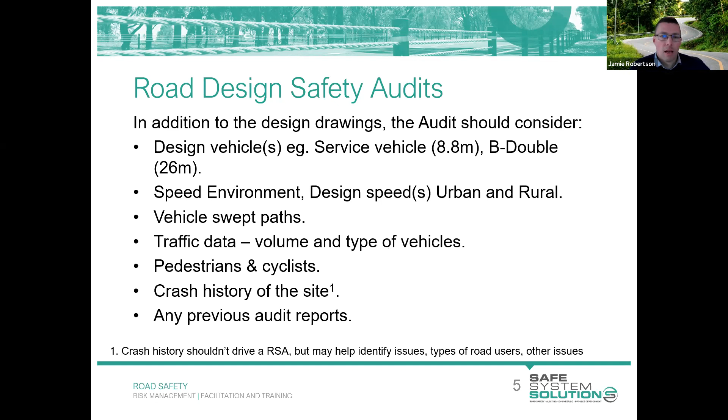I'd like to step you through a few common issues that we often come across when undertaking audits. A number of those are around the vehicles on which the design is based, so the design may not cater to vehicles or to an appropriate design vehicle.

This is probably a good point to talk about what is a design vehicle. A design vehicle is the largest vehicle expected to use a piece of road on a regular basis, so it's typically a truck or perhaps a bus that will use that piece of road frequently.

We also talk about checking vehicles. A checking vehicle is a larger vehicle, again, that we may want to check the design can cater for. The check vehicle is typically one that is expected to use a road fairly infrequently - infrequently enough that we don't design the road specifically for it, but we do need to cater for its movements. A checking vehicle typically isn't expected to make turns necessarily from the appropriate lane.

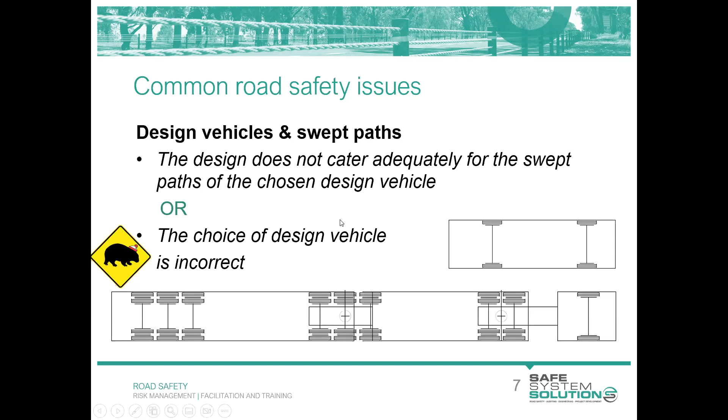You can get out on site. We're talking about design stage audits, but most design projects are upgrades to existing roads, so you can put yourself out on site, observe the types of vehicles getting about, look at the surrounding land use, and think about any changes likely to the land use that might attract larger vehicles, which might lead you to adopt a larger design vehicle.

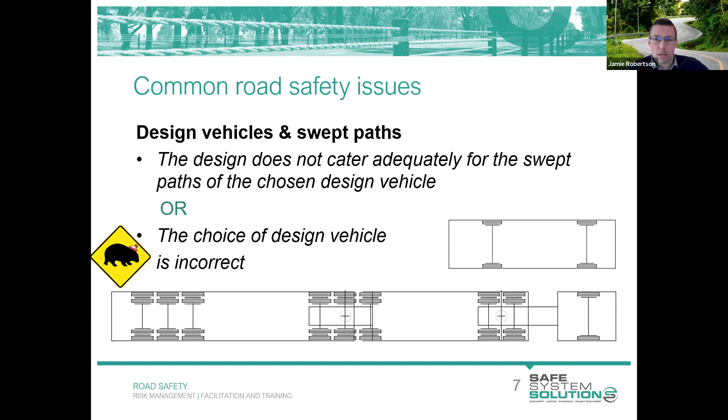So we've talked about the issue that a design doesn't cater adequately to the swept paths of a certain vehicle. Well, what does it matter? As an auditor, you need to think about the associated issue and safety concern. If the design doesn't cater to those larger vehicles, the result might be that those larger trucks encroach into areas they shouldn't, such as adjacent traffic lanes, which could result in side swipes, perhaps head-on crashes, even if it's an opposing traffic lane. Those vehicles might also encroach into pedestrian areas.

You might see vehicle conflicts between opposing right turns, for instance. A telltale sign that there isn't enough space for larger vehicles is impacts with roadside furniture. You might also see tyre marks over curbs and these types of things. So when you're out on site doing an audit inspection, pay attention to these types of things.

Now, that list of issues is all around there not being enough space for larger vehicles. The opposite can also be an issue. If too much space is provided as a result of adopting too large a design vehicle, that can open up the possibility of smaller vehicles taking corners at excessive speeds and so on. Too large a design vehicle leads to larger pavement areas, which might be hard to delineate. There are a range of issues associated with adopting too large a design vehicle as well.

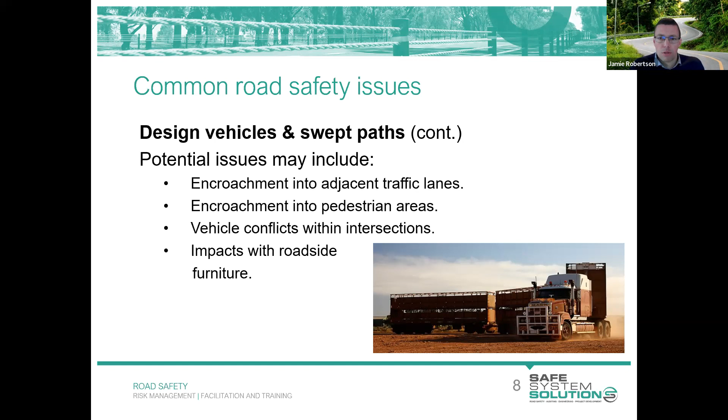There's lots of guidance in the Austroads suite around catering to turning vehicles, particularly at intersections. A couple of snips here from the Austroads Guide to Road Design, and on the right, the Austroads Turning Templates Guide. A few key things to note with these are the nominated radii. For particular vehicles, there are minimum and desirable radii for those vehicles to make turns at. A good swept path diagram will be transparent and will nominate the radius that's been adopted to generate that turn. Some other things you'll see there are some clearances between opposing swept paths, 2 metres in the case of the opposing right turns.

On the right-hand side, we see a swept path diagram for, I think it's a 19-metre semi-trailer, which might be on a 20-metre radius. Now, each radius, and there are a few given for each vehicle, corresponds to a turning speed. In the case of the semi-trailer on the right, we have a 20-metre radius, which corresponds to a turning speed of about 15 or 20 kilometres per hour. That's not a radius - it's certainly not a minimum radius. That's a radius you might adopt at a location such as a signalised right turn, where a truck might arrive on the green and make the turn with some speed. We can wind things down and adopt minimum radii at mandatory stop situations. And really, that's the only time we should adopt the bare minimum radius for a vehicle turn.

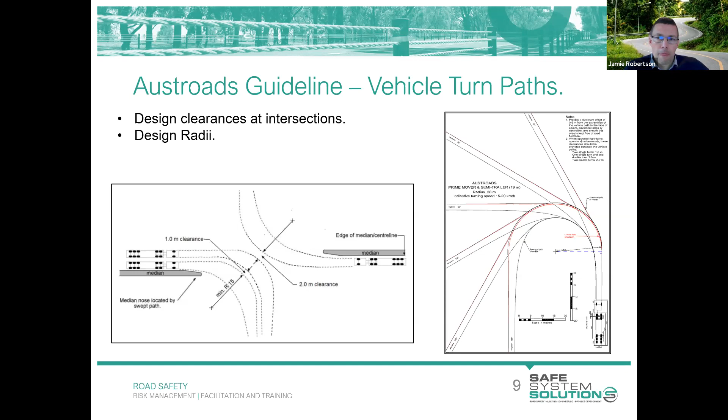So here's an example of a swept path diagram at a cross intersection. You can see one shown in purple and another in blue for the concurrent right turns from opposing directions. Clearly, it's a highly constrained site. You can see the property boundaries around the corners there, and not much room to spare between the property boundaries and our curbs.

We have a clearance in the middle between those opposing swept paths. So at first glance, you might think that looks okay, but if you study the purple one more closely, you'll see some funny things happening. One of the telltale signs is these little arrowheads that I hope you can make out along the centre line of the purple vehicle path. Each of those arrowheads basically represents a mouse click or a change in direction as that path has been generated.

The desirable way of doing things would be to construct that turning path on a single radius, a radius that accords with the Austroads guidance. And if that had been done in this case, you would have seen that swept path extend much further into the intersection and overlap the swept path of the truck from the opposite direction.

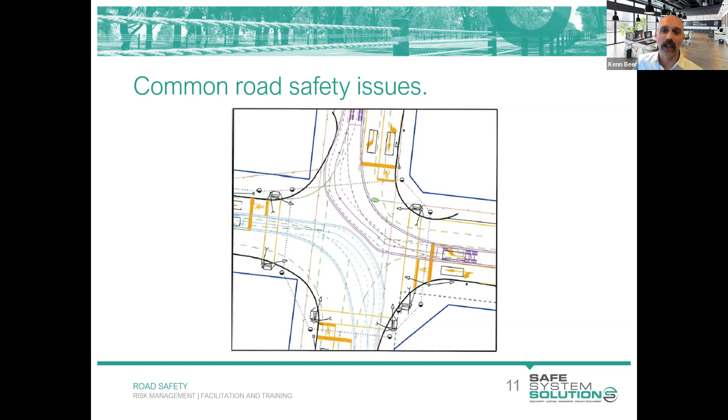If you're undertaking an audit, there is certainly a potential safety issue associated with the conflict between those concurrently turning vehicles within the intersection. A couple of things a standards review or design review might pick up that an audit wouldn't relate to the fact that the signal conduits are shown to pass outside of the road reserve, which is a no-no, but that doesn't have safety implications. Another potential safety issue at the top left corner is the lack of space available for a pedestrian footpath at that corner of the intersection.

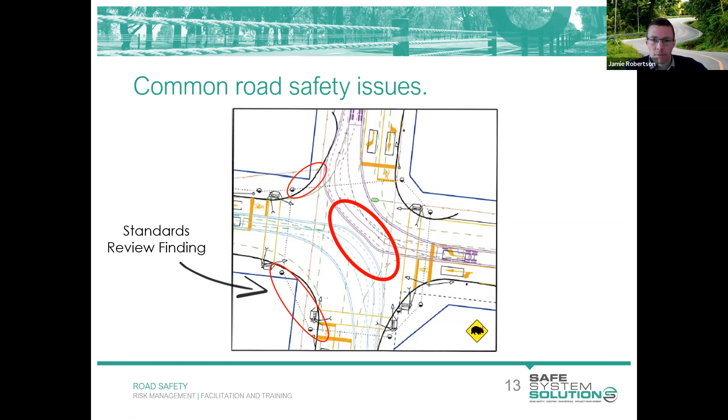This is another design that we actually inherited, and it goes to show there are some differing opinions around the application of swept paths in the industry. A design had been produced based on some swept paths. Essentially, the designer had assumed that if they could generate a swept path in a particular way, then the vehicle could make that movement and the design would be okay, without due regard to the Austroads requirements.

We found that when we generated some swept paths at desirable radii and turn speeds and so on, things didn't work at all. You can see here with the blue swept path, the left turn by a bus coming from the south, that movement encroaches significantly into this pedestrian area. So there's a risk to any pedestrian waiting at that corner.

This, unlike the previous swept path drawing, is more transparent. You can see the type of vehicle nominated here, which in this case is a 14.5 metre bus. The radius is detailed on the plans. Again, we have lots of lines representing wheel paths, vehicle extremities, and then that offset line on the outside.

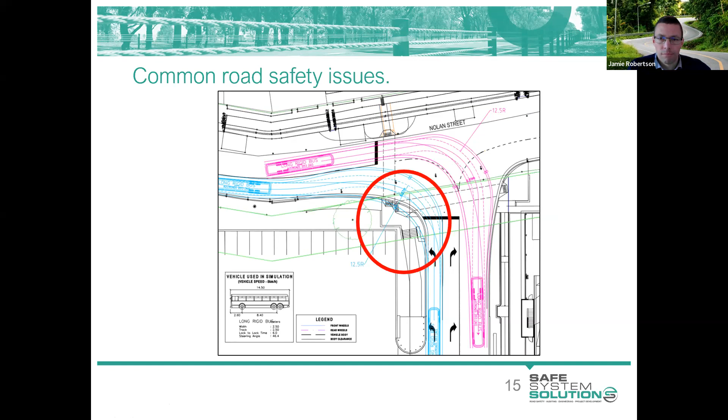Some other movements at the same intersection show there's quite an overlap between those vehicle swept paths that would be allowed to make those turns concurrently. So it is possible to fudge things in the AutoTurn software that's used to generate swept paths. But if you're using AutoTurn or reviewing swept path diagrams, be mindful of the Austroads guidance—the minimum radii, the clearance requirements between swept paths and so on.

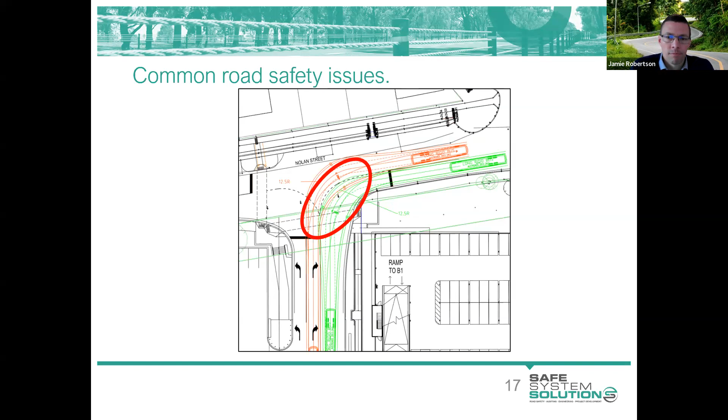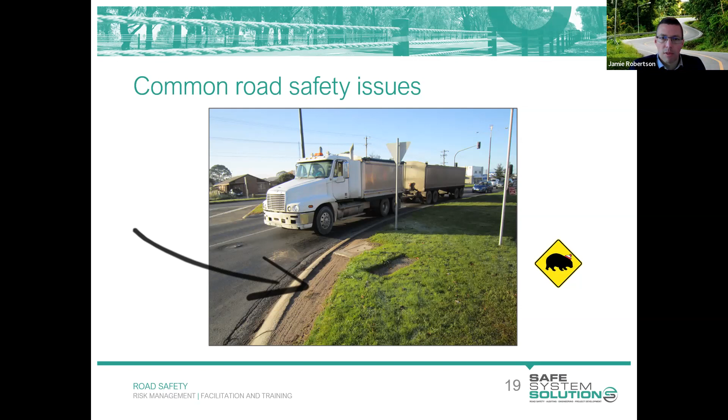It's not always the result of there not being enough space. Sometimes there can be issues with excessive speed at locations like this, or there can be a lack of advance warning or delineation to get heavy vehicles through that curve.

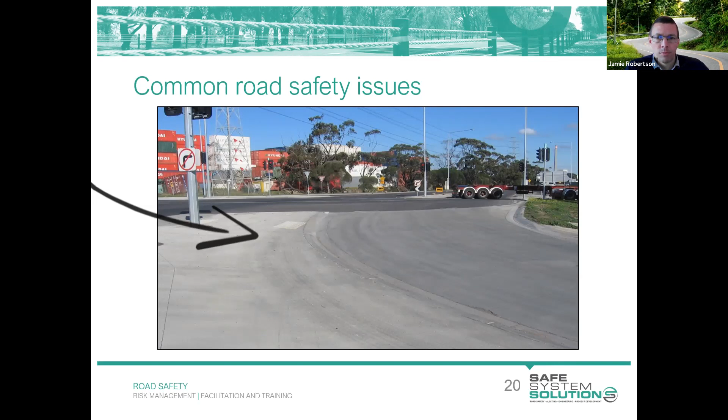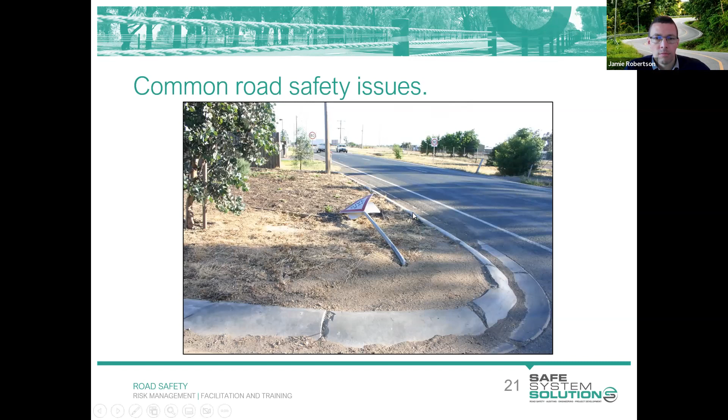Another issue that presents frequently is to do with sight lines. It can be the case that designs don't provide adequate sight distance for certain road users. You can check this at the desk, and you can also put yourself out on site and have a think about whether adequate sight distance is available. There are a list of sight distance requirements as long as your arm.

It's important for an auditor to have an awareness of relevant standards and guidelines when undertaking audits, not necessarily be an expert in them. That said, at the detailed design end of the spectrum, it is important to have a subject matter expert involved, and that can depend on the nature of the project being audited. If there's a pedestrian and cyclist focus, it might be someone with expertise in that area. If it's a geometric road design project, you might want someone involved who is perhaps a road designer with good knowledge of sight distance requirements.

There might not be adequate sight distance between motorists and pedestrians, perhaps waiting to cross the road. As an auditor, you can put yourself out there and attempt to cross the road at the required locations. Think about whether you would feel comfortable doing that, even before you've looked to the relevant standards. Think about, as a road user, whether you would feel safe making the required movements. If the answer is no, then look to a standard and see if you can back up your feelings by demonstrating that a standard isn't going to be met.

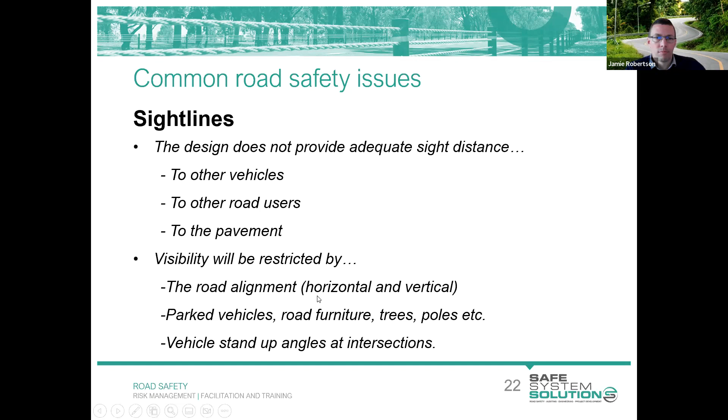One of the many sight distance requirements goes by the acronym SISD, and we might have a poll question here, I believe, Ken. Yep, I think we do. Let's get it going.

What does SISD stand for? Standard intersection sight distance, straight incline sight distance, safe intersection sight distance, somewhat impractical sight distance. Some good options there.

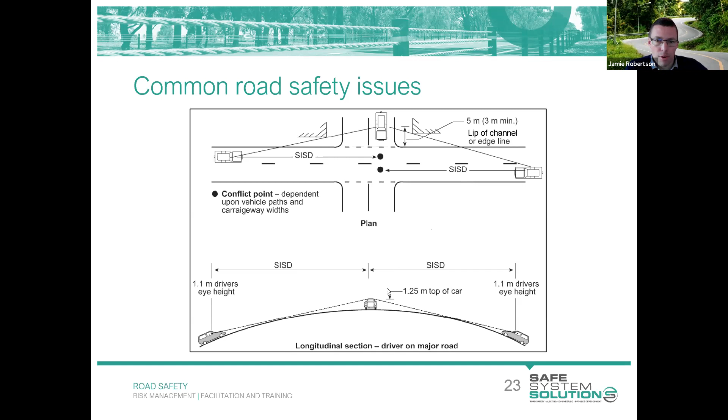Of course, with safe intersection sight distance and any sight distance, we need to look at things in the horizontal and vertical plane. Crests in particular can impede sight distance.

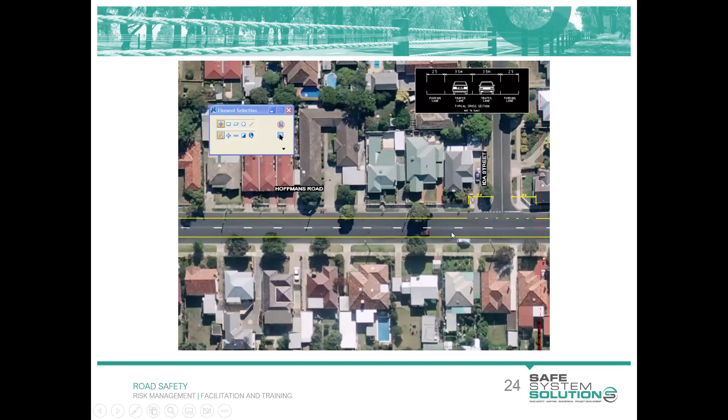A little example here of a road in Melbourne's north, which had quite a wide carriageway. At times when parking demand was low, this road would operate with a 4-lane cross section, which was less than desirable. An attempt was made to reduce the traffic function of the road, formalise parking by implementing some parking lanes. You can see some yellow lines there indicating that. This treatment was implemented, and those parking lanes, as you can see here, extend up very close to the intersecting side roads.

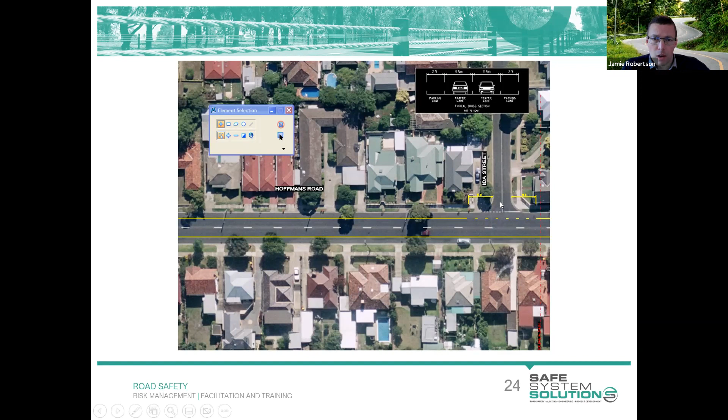This treatment was put in place, and it actually encouraged more parking and parking right up to those intersecting roads. An issue presented pretty quickly around cross-traffic crashes involving vehicles entering the main road from those side roads, and reduced sight distance was the key factor behind those crashes. You can see there a split second later, the car is upon you.

Perhaps I'll put it out to the group there, Ken, as a sort of retrofit. This has been put in. What could we now do to try and remedy this situation and improve safety for motorists entering from those side roads? All right, let's see if anybody's got any ideas, any thoughts there. What could be done?

Okay, a lot of people wanting to get rid of some parking there, Jamie. Often a bit of a challenge, isn't it, with local governments and removing parking? It certainly can be. Look, that would certainly open up sightlines if you removed even 1 or 2 parking spaces.

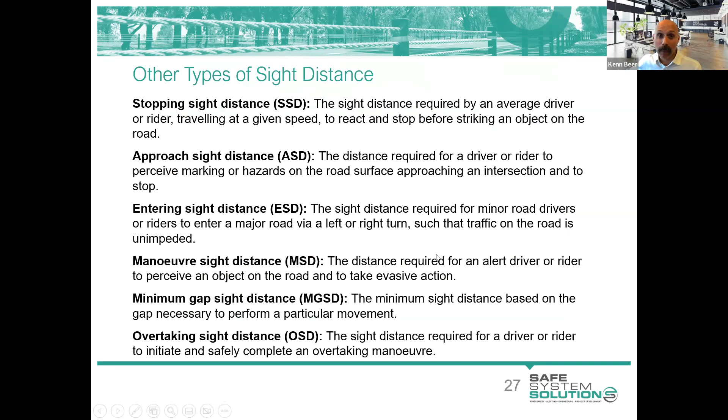So I did mention that there are lots of different types of sight distance. It can be a bit confusing - I'm sure some of you are familiar with these, some of you are not. Stopping sight distance and approach sight distance are the most basic and essential of the sight distance requirements. They're actually numerically equal.

The difference between the two is that stopping sight distance is measured from a driver eye height to an object on the road with an assumed height of 200 millimeters, which could be some sort of object, possibly a human body lying on the road. We need to provide SSD at any point along a roadway to allow motorists to react and stop in that situation. Approach sight distance is measured from the driver eye to the pavement level, and is particularly important at intersections

and other locations where there are pavement markings that a motorist needs to be able to see and react to. Entering sight distance, manoeuvre sight distance - some of these are more obscure, even nice-to-haves.

Overtaking sight distance obviously applies to two-lane roads in rural environments, where we need to decide whether or not we're permitting overtaking with broken dividing lines or not. If overtaking sight distance isn't available, we will seek to deter that with solid line marking.

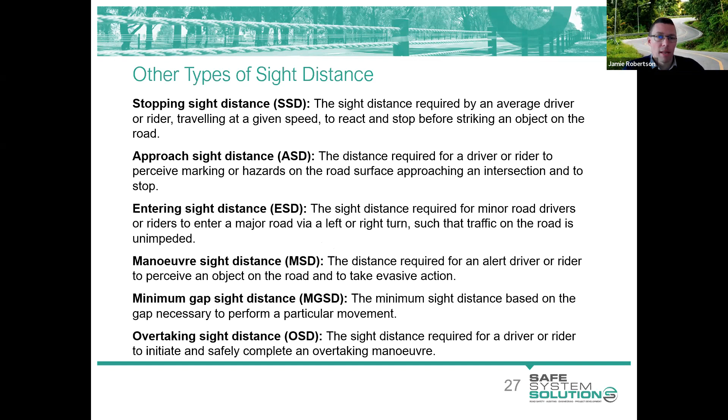CSD, crossing sight distance, is another one we can add to the list, which relates to pedestrians crossing the road - giving them adequate time and sight distance to judge an appropriate gap and make their movement across the road.

Often we're talking about long lengths of road with generally straight alignments. It's curves in particular, crests and dips - changes in the horizontal and vertical alignment - that can and do result in crashes. So it's important to provide motorists with advance warning of those features: curve warning signs, guideposts and the like, signs related to crests and dips and so on.

Surface condition and surface irregularities are another key contributor to issues on these roads. You can get corrugations, slippery sections and so on. So there's an important need for an appropriate level of maintenance, and alert treatments to warn motorists of those types of conditions if they're present.

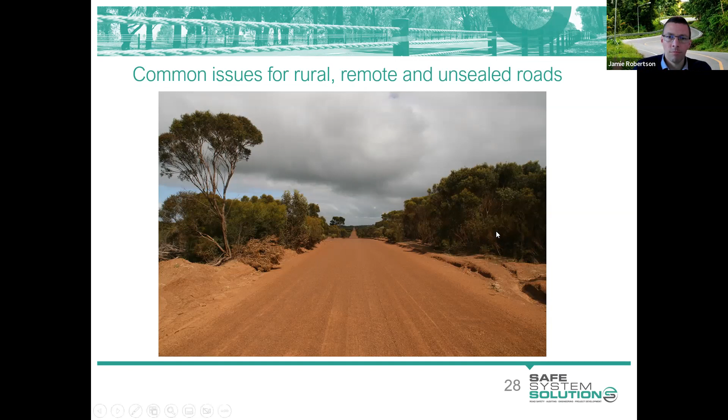So there is one for each of the design stages of audit. There's one for existing conditions audits, and there's a checklist for post-opening audits as well. So that's a good resource.

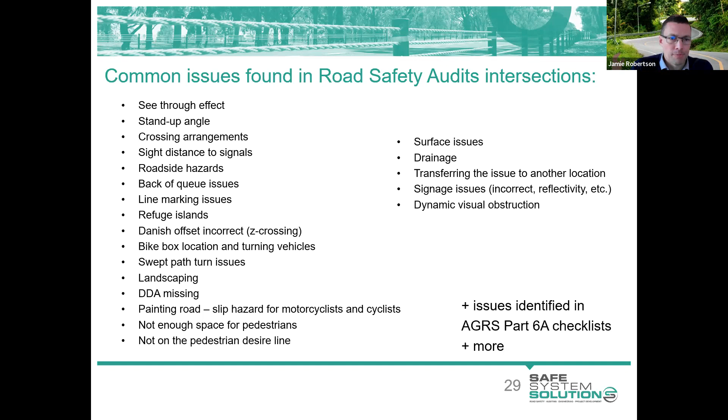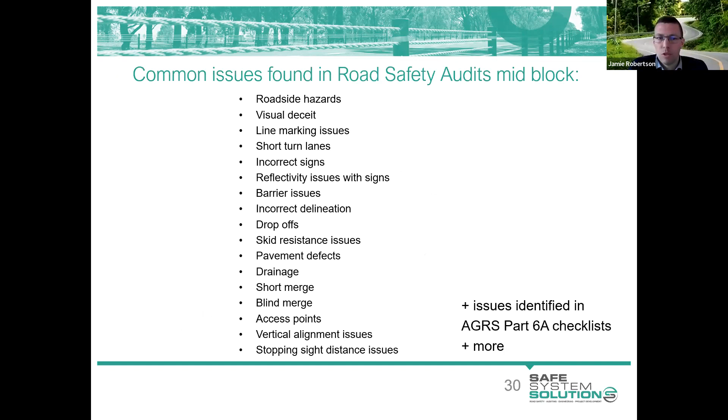Oh, Jamie seems to have paused on my end. Not sure if it's me who's paused or Jamie, but I'm going to just run through a few of these.

And so we've got roadside hazards, obviously. Visual deceit, which Jamie has paused.

Okay, good, thank you. Visual deceit, meaning, and we talked about that in the first module, different line marking issues, short turn lanes, and I'll pop in a prize for the crash type that you think.

There we go. He's completely disappeared now.

Short turn lanes. What would possibly be the crash type we'd be concerned with if turn lanes are too short? Any thoughts on that? Good, Michael in there nicely up front there with rear end, and side swipe's a good one as well. But we'll give Michael the prize.

So yeah, we want to have a think about the storage we're expecting and what's going to happen there. So let me just write that down.

And Tony, it looks like Tony has arrived. G'day, Tony. We'll be with you shortly, and I'll make it so your video can come on and we can see your lovely face. I'll get to that in a second. We're just finishing off Jamie's. He dropped out. Internet down in Hamilton failed on him. But I'm just finishing off his content. I'm sure he'll probably log back in shortly. Sorry, I'm going to get Jamie's content up and running.

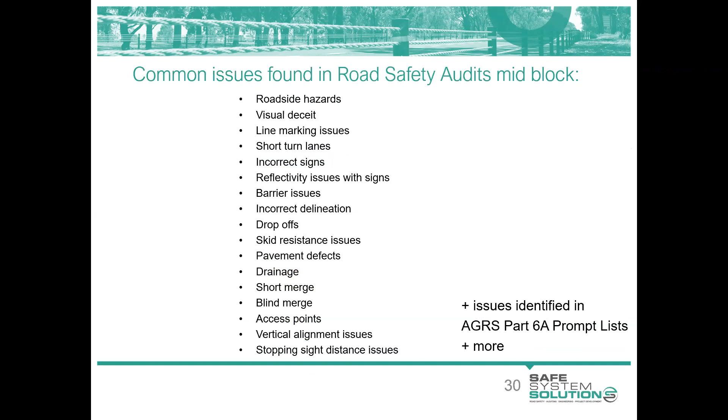It looks like Jamie's back with us. Yes, apologies. Internet dropped out. I can't turn my video on, but it's probably okay. That's all right. We're going to take a little break now. I don't think. Sorry, I'm just doing a couple of things here behind the scenes. So now both Jamie and Tony should be able to turn their video on.

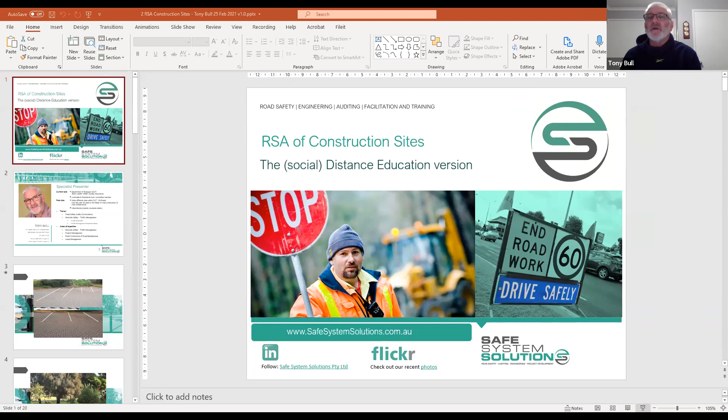Now, can you share your slides? How's that look? Yeah good, we can see the screen. Hold on, let's just... sorry, I should have done that first. No that's all right. I think that's... come on, why isn't that doing? There we go, yeah, is that good for you? Hasn't quite come through, I reckon because it... I'll unshare again, stop share. I didn't put it in presentation mode, and... right, and if I go to screen one.

Yep, okay, now if you go up to where it says display settings up the top, because we're seeing the presenter view. So go to display settings up the top, in the middle... left, yeah, right, a little bit right now. Display settings, oh where are we going? Participants, chat, QA, polls, oh no. Sorry, on your presenter view, where your mouse is now, straight up, yep, display settings. Up a little bit more. I can't see that, I think we're seeing something. Close, that's all right, that's all right.

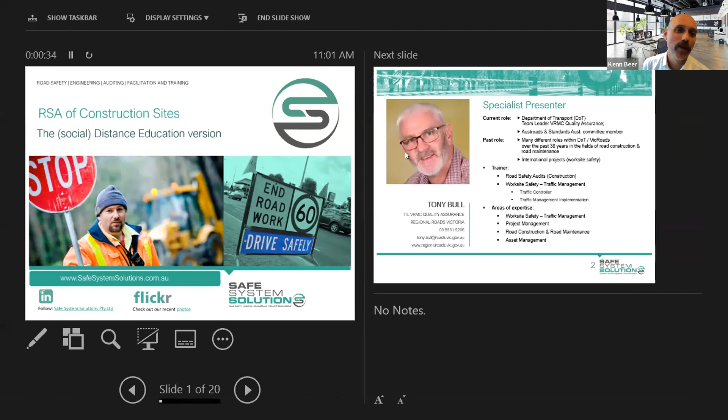Are you using two screens, yeah? Oh yeah, I've got three. Okay, well if you go share screen and just make sure you share the one with the full presentation when you do that, because you shared the one with the background there. Yep, now, oh no, we're seeing just a blank desktop. So go back to whatever you had, where you minimized it. If you see in the PowerPoint up the top, just up a little bit with your cursor, right there. That's just, I'm hitting on participants. Oh, so I'm seeing your mouse on display settings, can I just minimize that? There we go. Is that it? Okay, yep.

Yeah, yes, either of those will work. Yeah, we got there, beautiful. So that is showing the presentation, it is showing the presentation now, I've got it there, yep. And there's your lovely face. So righto, we'll be ready, perfect timing, everybody's having a break, so we're ready to go.

Hey Kenn, you're recording this aren't you? I am. Would I be able to get a copy of this little segment? Definitely, yep, beautiful, I'll make a note of that.

I've started my Cert 4 in training and assessment. Oh yeah, your refresher, yes again. Yeah, mine's a little old as well, so I have to at some point get to refreshing and updating. No, okay, beautifully done.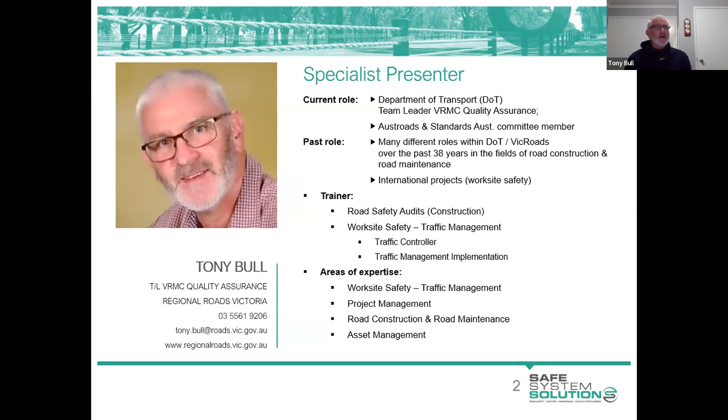This is an area I've been in a long time, but I continue to try and work towards that safer working environment.

This is just a little demonstration on what is perceived as the right thing. Unfortunately, if I'm the project manager at a construction site, I have blinkers on. My real focus is getting the job done, and I need sometimes that outside person or team to come in and do an audit on my site, especially a road safety audit.

I don't know whether Kenn's gone into much detail on the difference between a surveillance or inspection versus an audit, especially a road safety audit. While we should familiarise ourselves with standards and guidance material, it's our expertise and understanding of what safety looks like, and the potential for an accident or harm to the travelling public or to workers, that matters.

We do have checklists or reference questions that we should be considering as part of the road safety audit, and Kenn will go into a bit more detail on those after my session.

It's really important that you have that open set of eyes, that you look at the job in its entirety and the potential that something might go wrong, so it can be identified. It's part of your recommendations whether it should be attended to straight away, or perhaps next week you should look at doing something different. So it's really important that it's not just a tick and flick process.

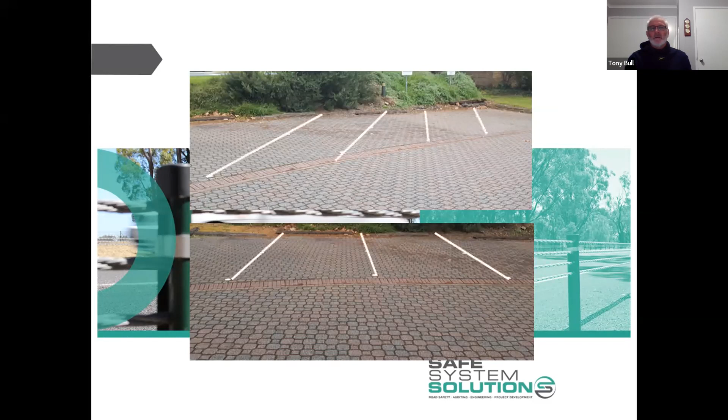This is the car park in the Warrnambool office, where I haven't really been for the last two and a half years. We've got lines there that depict how we should park, whether it's 45 or 90 degrees. All my time I've always thought it was 90 degrees, but as you can see, one of the customers thought the lines were for 45.

This is a very basic example of what people can perceive from the message we're trying to portray to the travelling public at our construction work sites. If we haven't got our delineation right, if we haven't got our advance warning right, if we're putting hazards in the way that cause confusion, or our signing causes confusion between temporary and permanent signing, this is what we end up with: people not really understanding whether it's 90-degree or 45-degree parking. So we must ensure the message we're portraying is clear.

With traffic management, signing is our big tool, so we must try to cover off the message, getting the travelling public safely through our work site at a speed acceptable for worker safety. Just putting up a 40-kilometre-an-hour sign will not ensure that traffic will actually travel at 40 kilometres an hour.

This is another important role of our audit process: to ensure the site has been signed to match what we're trying to achieve. If our workers are in a confined area, maybe working over a 100 or 200 metre area, we need to sign that appropriately to protect those workers. Outside of that, do we need a lower speed? Probably not. But unfortunately, people think, well, I'll be working over a distance of 600, 700, 800 metres in one day, so I'll just set my signs up to cover that whole distance.

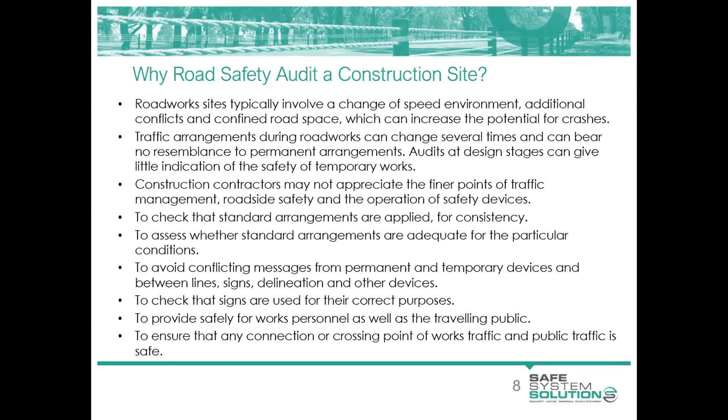And that's the reduce speeds - that's the point I wanted to make, Kenn. And I thank those, and well done to someone who said it should be associated with the traffic controllers and, or portable traffic signals or permanent traffic signals or semi-permanent we use at roadworks. Yes, I'll see prepare to stop associated with the roadwork ahead sign - it has to go with the traffic controller or traffic signal sign. So it's the message to the public that there's a device or a person up ahead that you may have to stop. So that's where that association is, and that's why the colour of it is in the colours of a regulatory type sign.

So that's you make sure that signs are used for their correct purpose, and also that they're taken down at the end of the working day. If there's no workers, please don't have worker symbolic signs up, don't have your prepare to stop signs up. Have your aftercare, have your skidding cars, have your stone throwing signs. It may be you do need speed management, but we shouldn't be using 40k an hour if we're not using that to protect workers. We should be able to make the site as safe as possible, where the lowest speed we should go to is 60k an hour.

I know there's always exceptions to the rules, and again, as auditors, we need to delve into that. If our aftercare audit or nighttime inspection is looking at that signing and the site is down to 40k an hour, there needs to be really good documented evidence of why that site has been left at 40k an hour when there's no workers present. And I really would like to push that one.

So, yeah, we've got the safety of our workers and also the personnel. And we want to make sure that if there's a connection or crossing point for the works traffic, that interaction with the public is kept in a safe way. Now, whether it be with traffic controllers, if they're crossing a point where the public are using a road, or whether we use traffic signals, we've just got to make sure that that crossing point is kept safe.

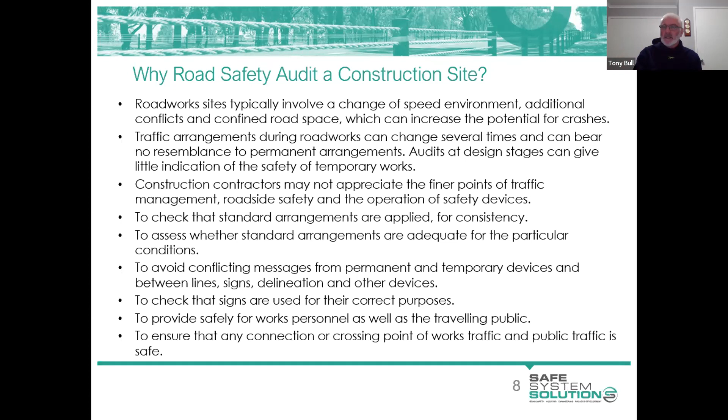Kenn, I'll also ask you to give me a bit of a warning when I should stop talking. You know me. Okay. No, I get a little bit wrapped up in the moment.

Yeah, no, I like the passion. Yeah, a good 10 or 12 more minutes is fine, Tony.

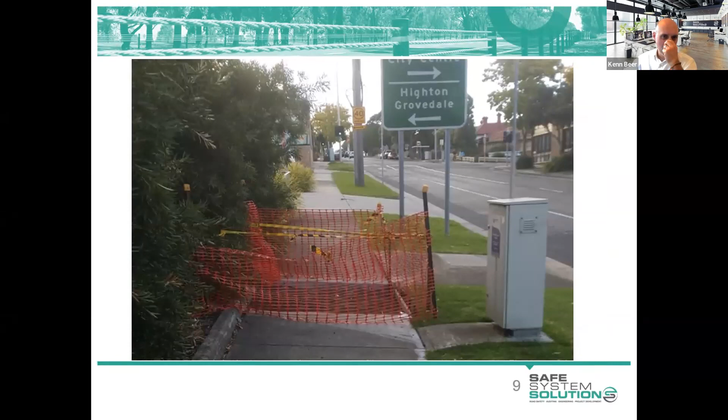Sort of reiterating what you're saying, Michael, they're seeing a lot of that, thinking that the pedestrian closed sign does the job, which it certainly doesn't. But any ideas on how you might assist a visually impaired pedestrian through these sorts of areas?

The visually impaired will know the route they're taking, their normal path to follow, and that's why we have the DDA to let them know when they're getting to intersections or crossing points. So outside, and during the working hours, let's have a dedicated person available to help the visually impaired get around this site. We can't have them going through it.

Outside of the working hours, we should be providing a path of a compacted crushed rock base so that they can still use this site. Or the alternative is we have to provide a crossing point, and that becomes quite difficult with a small job like this. So the little bit extra work at the end of the day, let's put a crushed rock base down so that path can be utilised by pedestrians.

A person with a pram, that would be a really difficult site to try and get around. If we provide that solid base, crushed rock path for them to use overnight, the next day we've got to take a bit of crushed rock out. It adds about 10, 15 minutes to the job - get the concrete in, get it set. Again, traffic controllers while it's going off, but just don't close a footpath like that. It really does become a situation that could cause difficulty for many people.

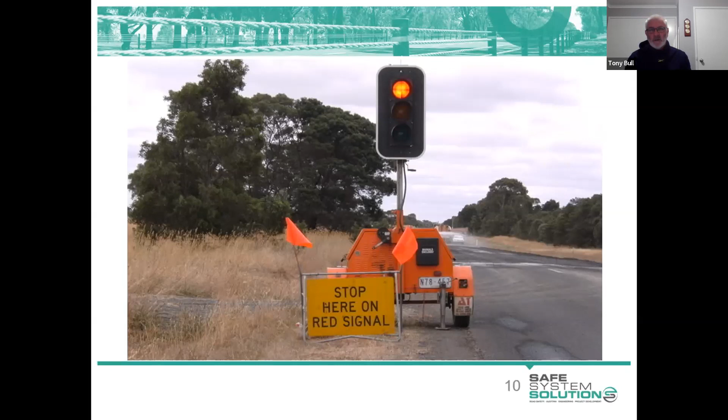And we've gone to an automated - well, not totally automated, but an online application process. It does have its moments where it can become a little bit long-winded, unfortunately, but it's part of that. We need to ensure that you do have that MOA, or memorandum of authorisation, for changing major traffic control items at roadworks.

Five more minutes, Tony. Thanks, Kenn. Quick question for the group.

Although that's an interesting point about a traffic controller with a stop bat for pedestrians - they actually don't have to comply with it because there's not a rule that says they have to, because they're not a driver. So we do use it to help manage pedestrians, but we shouldn't really be using them that way.

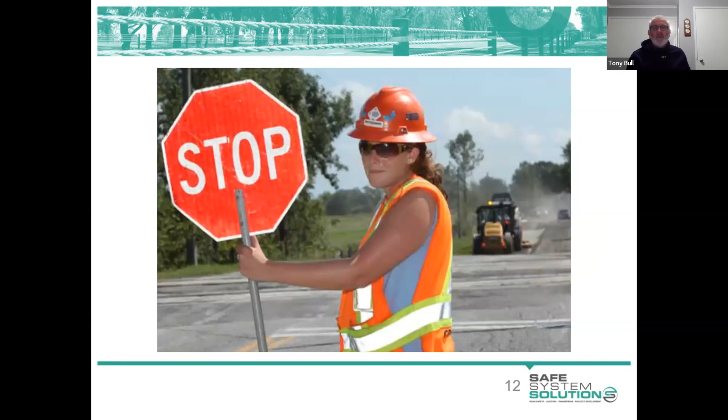That's really it - good advice. All right, let's keep ticking along. So yes, we can't use that. What have we got - 8-sided sign for traffic control, because as David said, a driver may like to proceed on because they've stopped and there's nothing coming, but they're not aware the grader is about to pull out, which will be an issue. So we must use the round stop-slow bat, and as you can see, a well-dressed traffic controller in this instance.

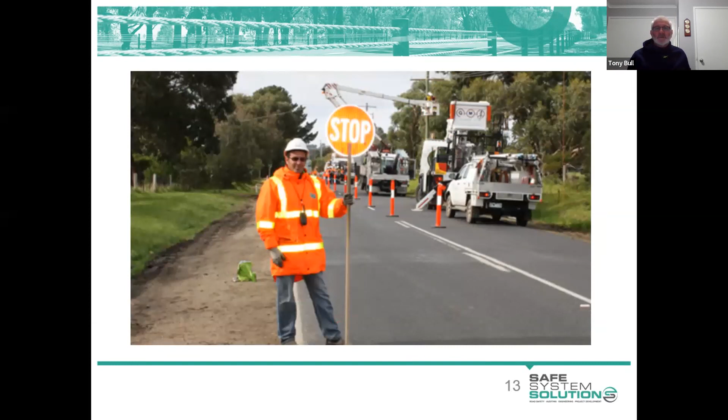So looking at when to audit, we can review the plans of the guidance scheme. We need to inspect the site day and night. Early in the beginning of the construction site we should be doing inspections both day and night, and if there's been any major changes to that scheme, we need to inspect both day and night. So the message here: we've got different stages of construction - the plans, early in the job, and where there's been major changes - but you must do inspections both day and night.

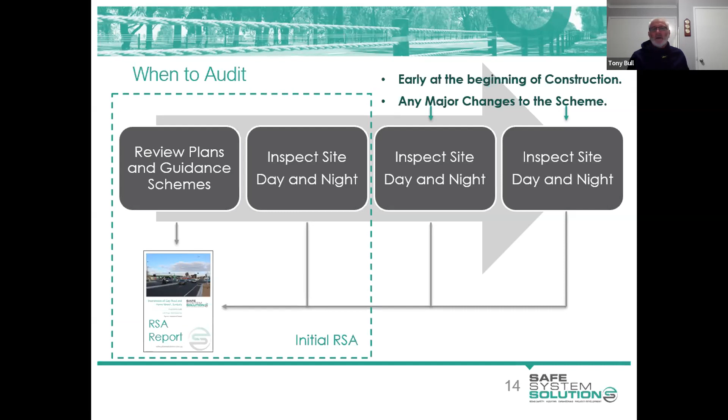I have a list of common issues here, and we've probably talked about most of these through the presentation. Have we got the adequacy of advance warning? Are the proposed speed limits appropriate? Is the selected layout achieving what we need to achieve? Are there conflict points that are being managed? Is there anything that could be misread by the users? Are the signs kept clean? Is mud or dust obscuring any of our devices? Are they being managed on a daily basis to ensure that?

And that's another reason for doing a night inspection. If you've got signs that have mud or dust on them, reading them at night under headlights, they become really obscured and may not be effective.

Traffic barriers need to be installed to the manufacturer's specification. There is a document - Ken, I think you included in the suite of information for this course - listing the barriers approved for use in Victoria. I'm not sure I have, but I'll pop it in there: Road Design Note 604. That's one document I see gets regular updates, Ken, so it's certainly good for people to keep on top of and to have available in their arsenal.

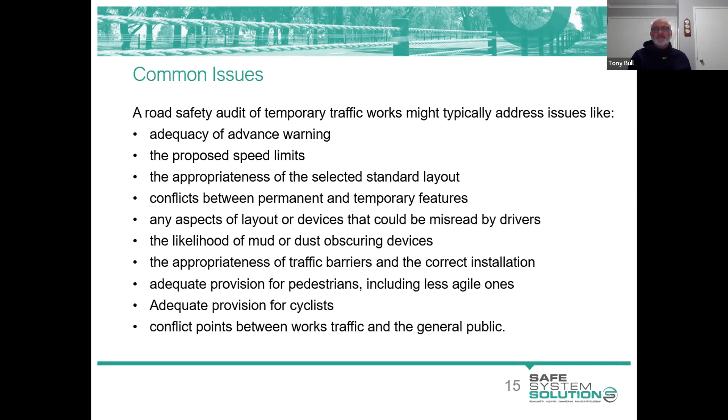And very quickly - as I said, Ken will go through this in more detail after my session - what's the new name for them, Ken? It's not a checklist anymore? Prompt lists now, Tony. Prompt list - I probably should change the slide. So there's just a few items on that list, and as I said, Ken will go through it.

But just to help you with your audit - it's not the be-all and final list of things you should be looking at, they're just to help you with your audit when you're out on site. As I said, it's that observation from a fresh set of eyes, looking at a job to make sure it's operating safely, and you've got these lists to help with that assessment.

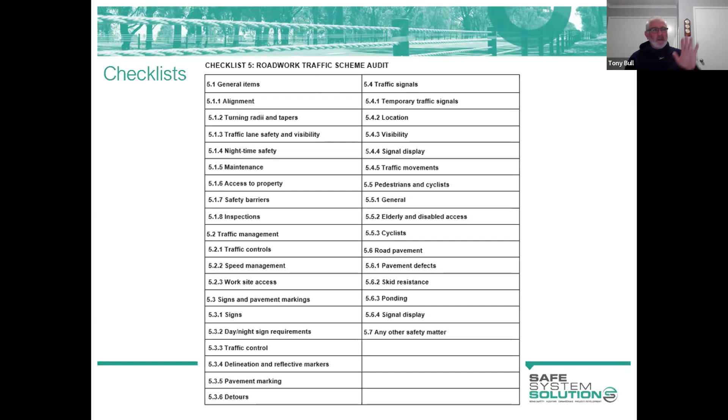I think that'll do me, Ken. If there's any other burning questions people might have before I pass back to yourself.

You've done a beautiful job there, Tony. And again, apologies for giving you only a short time slot, but you've done well to cover it off there.

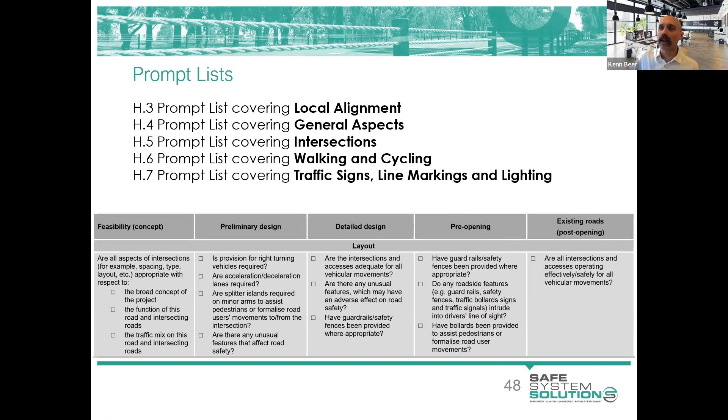Tony said it beautifully, they're not the be-all and end-all. That's not going to cover off absolutely everything, so you need to be generally looking at the site, but they're a really great place to start and help you thinking. Thought starters only, stand back and look broadly at the project, look at it from a common sense perspective. There will be a huge amount of things in these prompt lists that you will go, well, that's not applicable, because they're trying to cover off all the road scenarios out there, motorways, local roads, intersections, mid-blocks, everything.

And so a lot of the time you'll write not applicable, or you'll just ignore that one, but at least it's prompted you to think about it. You do not submit prompt lists as part of your road safety audit. So you might have pages and pages of these prompt lists where you've written notes or said not applicable or the like. None of that gets handed in. All you do in your audit report is things that you have identified as issues. So that's the prompt lists.

Now, they are in the Austroads Guide to Road Safety Part 6, and that is in the resources in the learning management system, which I'll take you through shortly.

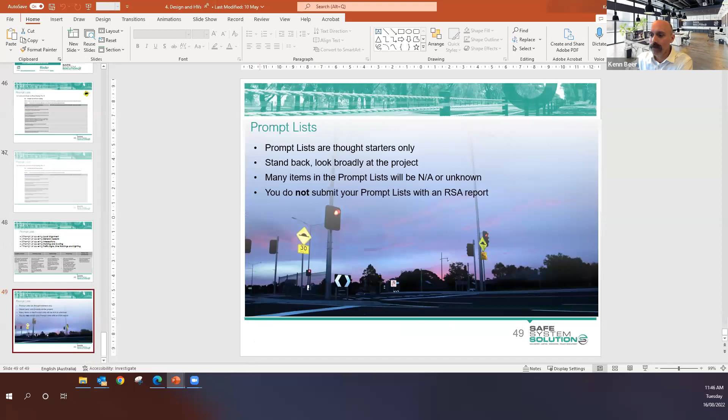Okay, pop your questions in as we go, but I'm going to give you your assignment now. So we're getting into some of the pointy end of this course now. You've got some good content. You've done your research assignment, and well done on that. And if I get time at the end of this session, I'll give out some prizes on those. If not, we'll do it at the start of next session.

You're going to do now a bit of practice in finding issues and then writing them up. And then that will get you perfectly set up to undertake your mock road safety audit at a site near your home or office or whatever address you gave us. So what we're going to do is a bit of this 360-degree auditing.

Sorry, I was just reading a comment there about Wally's. Yeah, you've got to keep your eye out for Wally.

Be elusive. So what we're doing now is undertaking a little bit of a desktop practice. I call it practice because you really can't do road safety audits in their totality from just the desktop or even Street View or anything like that. You've got to get out there onto the site. But this is a pretty good way to practice getting things going.

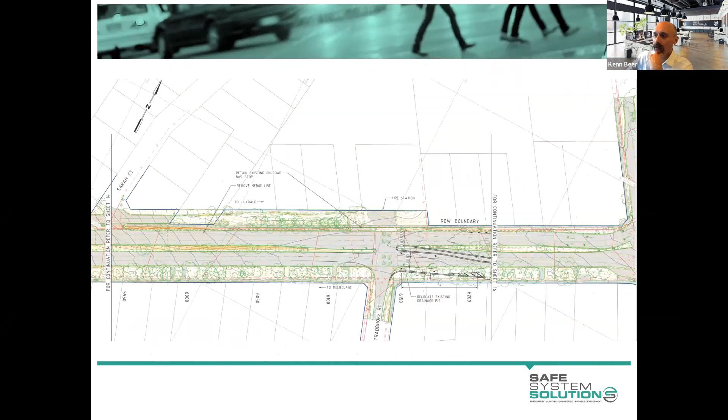You're going to look through them, and there's a few lead-in plans. But what we've also done is provided you with some 360-degree footage of the existing road environment. Now, we're not wanting you to do the audit on the existing road environment - you're doing the audit on the future when it's signalized. But what we want you to use this for is to understand the site, understand what's existing there, how are things going to be changed, how are people using it, what's the land use, all of these sorts of things.

So the way you do this is to bring up the PDF of this, and I'll show you where you get all this shortly. Then you can click on any of these little cameras and it will jump you to a 360-degree view. Hang on a second, I'm going to skip this. There you go - you get 360-degree footage of the site from that point. You can move this around and look at what's going on, how people use it, what's happening there. You can look up and around.

So this is what is existing. Remember, you're not auditing the existing conditions, you're auditing what's going to be built, but this really helps you understand the site. Now, if you've got the goggles, you can put your phone into them and move your head around, and it's kind of like you're out on site. It's really not as good, but it's a little bit of fun to try that.

So you get a couple of minutes of footage on each one of these that you can use, and it's quite helpful because you'll be able to see from different spots, different bits and pieces.

You can see that there's a Danish sort of offset style crossing there. You can see the land use. You can see where pedestrian desire lines would be. You can see whether there's lighting and the like. So that's all there to help you.

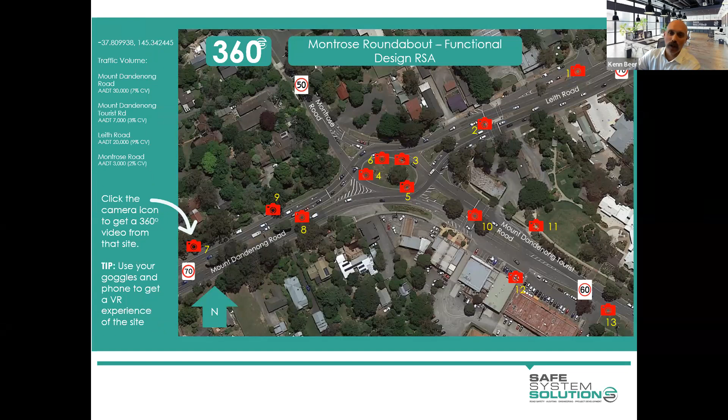You've got a bit of information about traffic volumes and the like, and you can do it from your desktop computer. But if you want to try it on your phone with the moving around, give it a go - it's a bit of fun.

So you've got then some instructions on what we're going to ask you to do. We're going to ask you to look at the designs, look at the existing conditions, and find 2 safety concerns about the design or how that design is going to interact with the road environment. Then write those 2 up properly. That's all we want - just 2.

We've given you an example one. It's that one I took you through, so you know what it looks like.

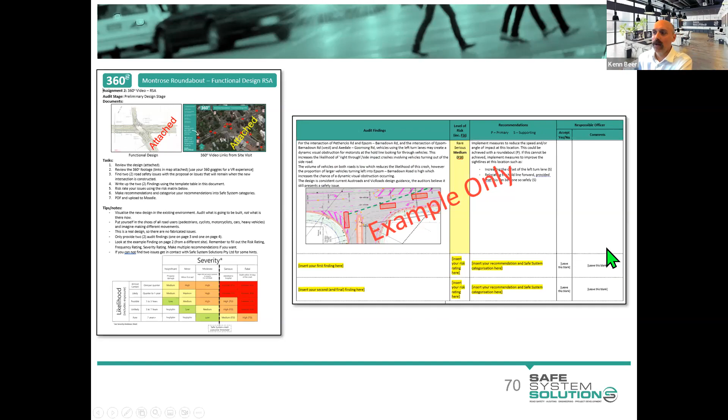But what I'm going to do is jump into the learning management system here, and you can see you've got your reference documents and resources, which is where you'll be able to find the Austroads Guide to Road Safety Part 6, where you'll find those prompt lists if you'd like to use that. Road Design Note 604, as we talked about with Tony just there, has the accepted barrier products, just in case you wanted to find that.

But you can always get that off the Department of Transport website, and I always encourage you to do that because they sometimes update it and then you've got an old one.

But if we go back here and go down a little bit further, you're probably feeling quite comfortable with all of this now. We're down here and we go to writing road safety audit findings - this is where we want to go. In here, you'll see you've got the sites for 360-degree filming.

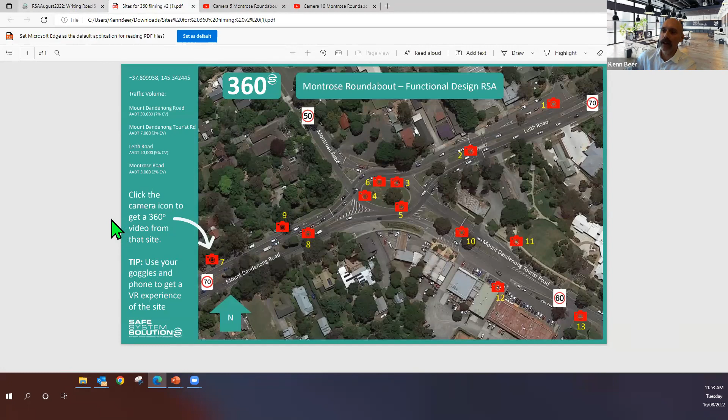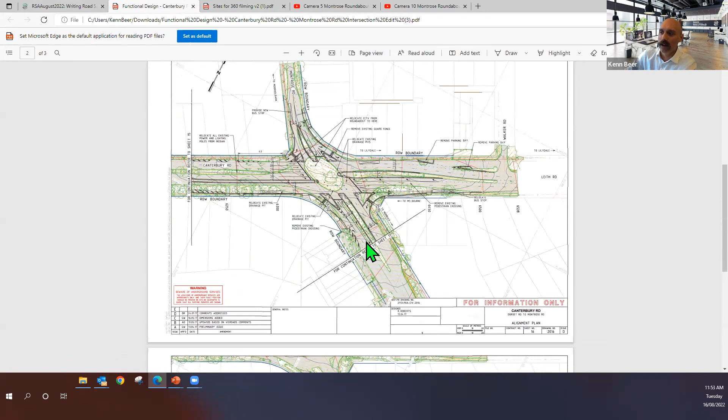Or they have been filmed now, so that's a PDF with the links to jump in there. You've got the functional design, and you can see there's the design. It's an actual design - we didn't fabricate it, it's a real design there. But you should be able to identify some issues that you would like to report on.

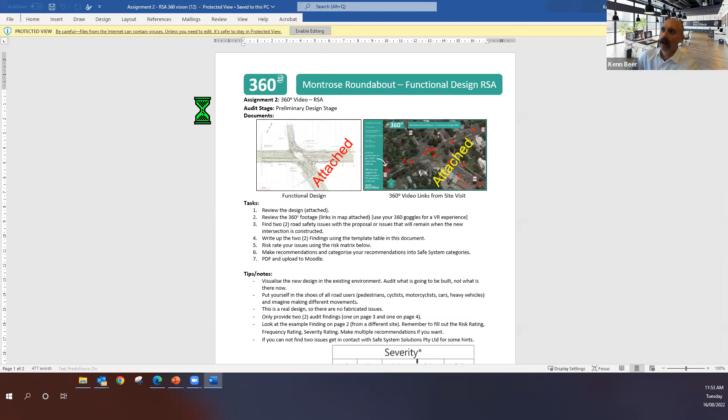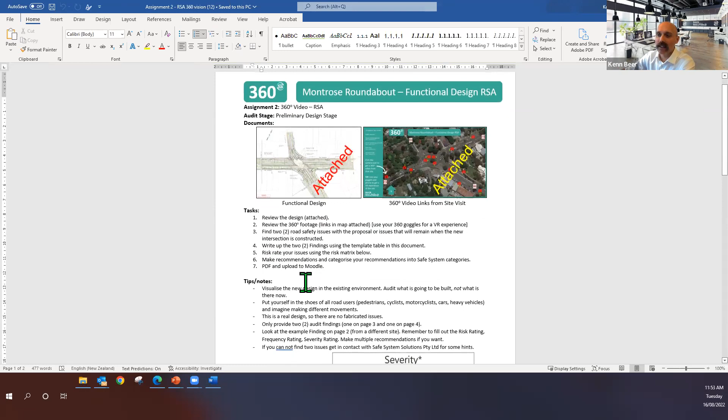So you've got those there, and you get a Word document here, which is what you're going to be filling out. Just wait for that to open up. You can see there that it's got instructions, it's got your tasks laid out there, 1 to 7. Follow those tasks - we've even given you some tips, some notes, some things to help you out.

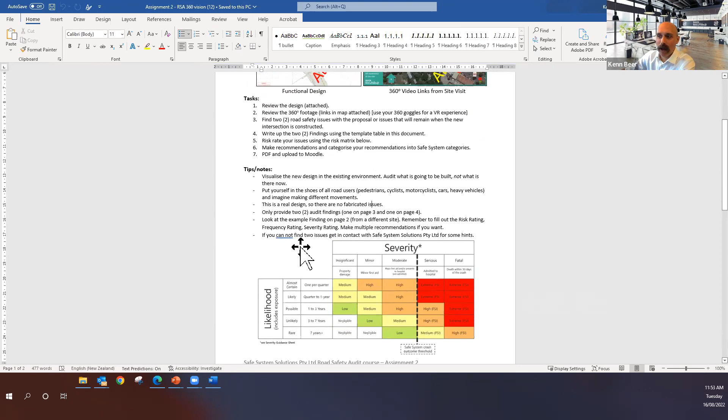We've put the risk matrix to help you in assessing the risk. So use the risk matrix.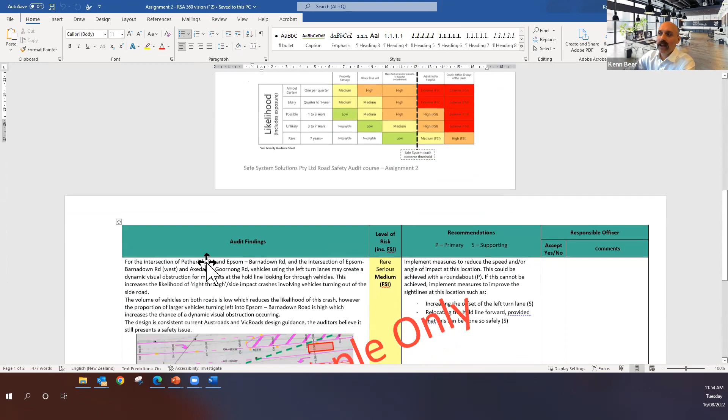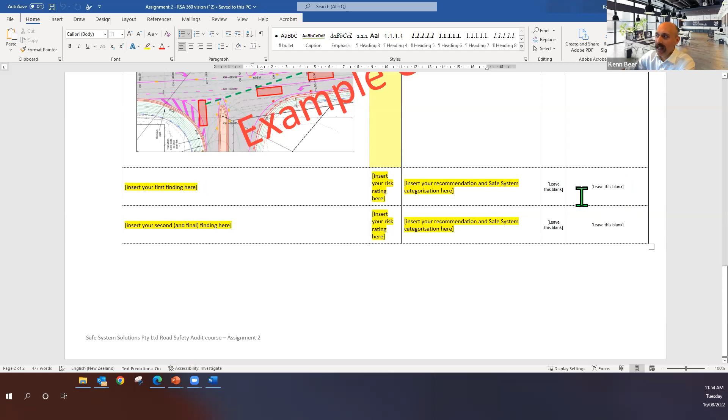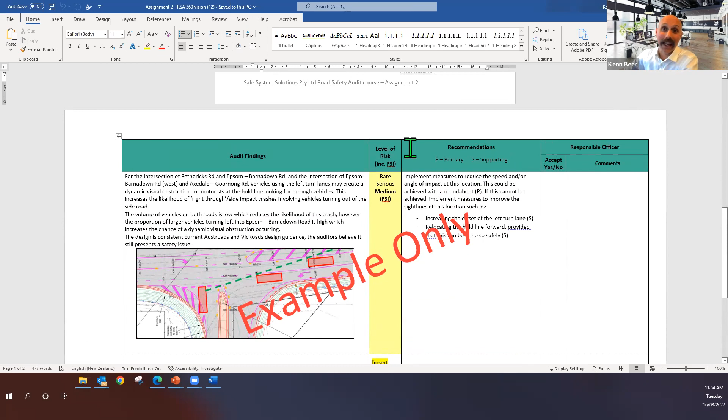We've given an example here. It's a different site completely, but it helps you tick along. There are two rows here where you put your findings, risk rate them, and put your recommendations in. Leave the responsible officer field blank, as that's a reminder for whoever receives the report that they've got to do something with it. Remember to follow the formula or recipe we talked about, and put a snip in there. That's going to make it a lot easier.

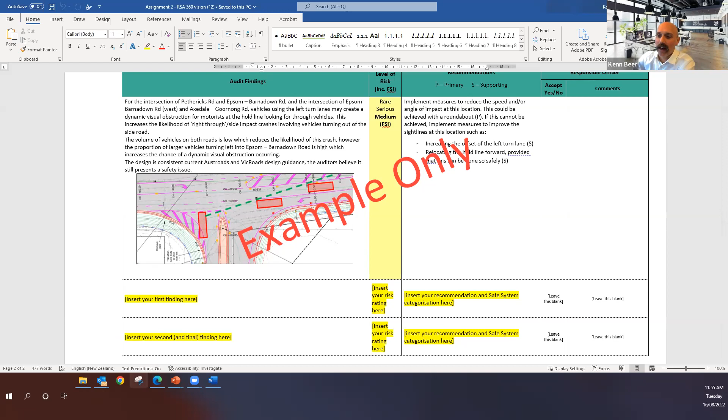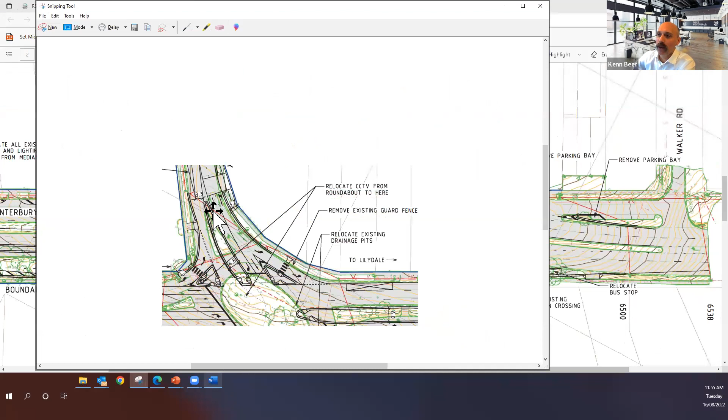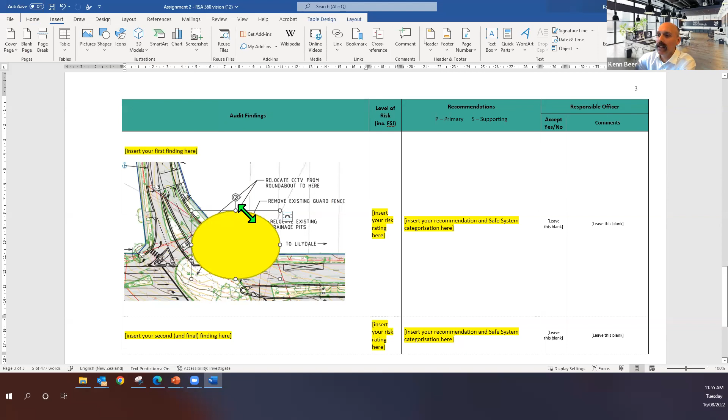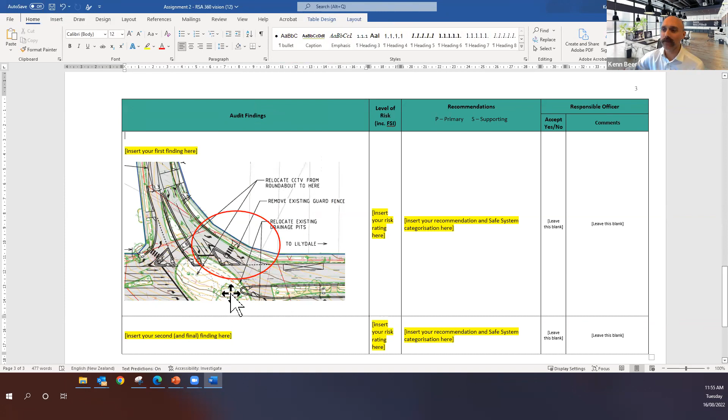So if you're working on the design and you're interested in something like the slip lane there, take a snip of that slip lane and bring it in here. Drop it in, and then you're able to write about the slip lane. We could even put a little circle around it, because that's exactly what we're interested in, and make it red. Now it's clear what point we're talking about. Then you can write some information following that. So that's what we'd like to see.

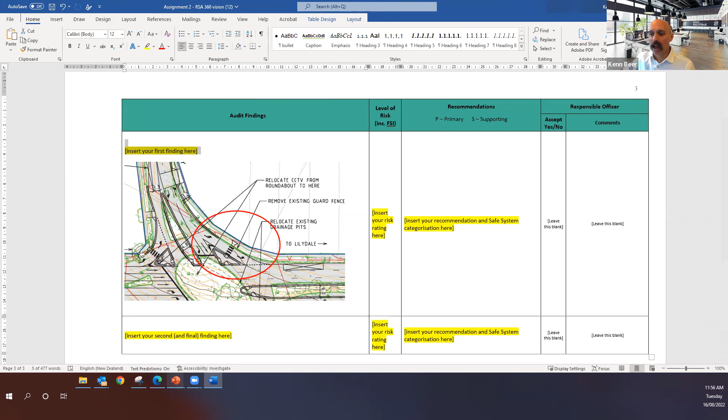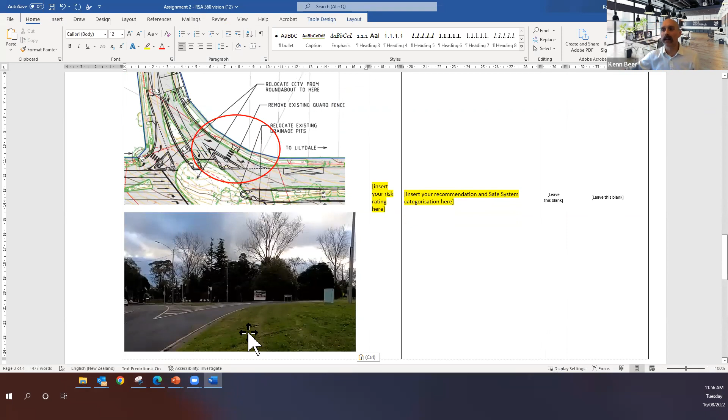Or maybe you were there and had something of interest regarding the roundabout, talking about how the slip lane is going to come out here. You could take a snip of that too and pop it in as well. It depends on what you're finding. Anyway, you get the idea.

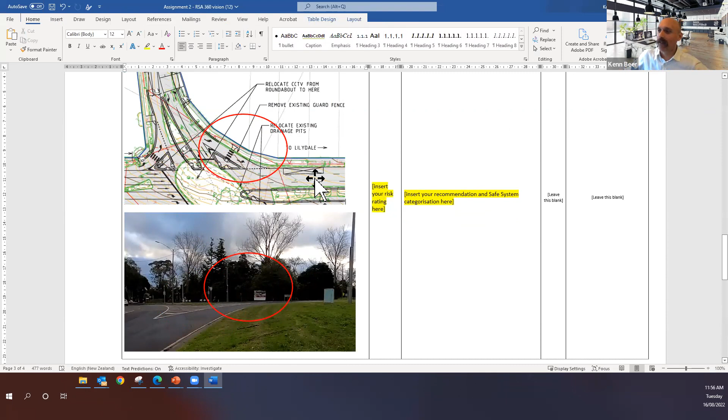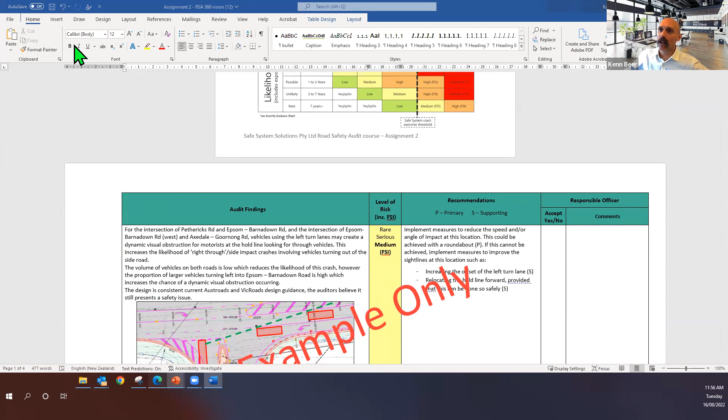I'm here to help you if you can't find any issues, but I think you might be able to if you think about some of the stuff you've been working on. So then you're going to PDF that and upload it back into the learning management system, add submission, upload it there, and you're done. Just two issues. Okay, let's go back to here.

I'll check when it's due. It's due Friday, close of business. We want you to get that in by then so we can give you some feedback. So when you're doing your mock audit, you've already got feedback. If you're making errors, not providing enough information, or providing too much, we can help guide you before you get into the next assignment.